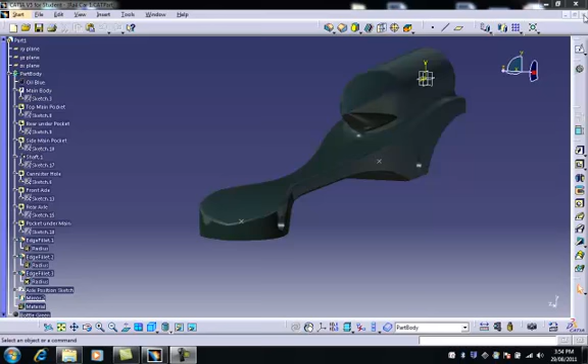Now that I've completed the initial design for my rail car, including axle holes, axle positioning sketch and fillets to all of the relevant edges, I can now close that file and begin thinking about assembling the product. I'll close that. Before we go further, you will need to import these 4 files from the intranet into your computer.

Having done that, we go to New and open a product. So, to begin, the first thing I want to import is the car body. In order to do that, I right click on Product and go down to Components, Existing Component, and then I need to navigate to find the body of my car, which in this case is in that folder called Rail Car. So I open that, and that first part has been imported into the product.

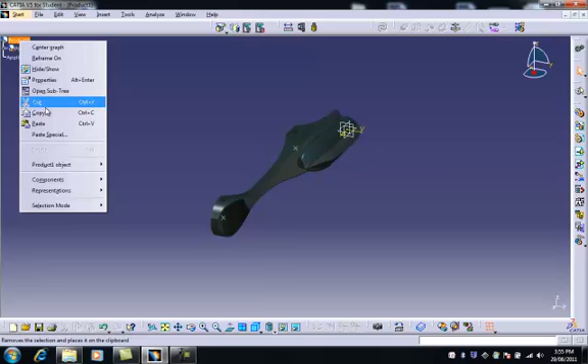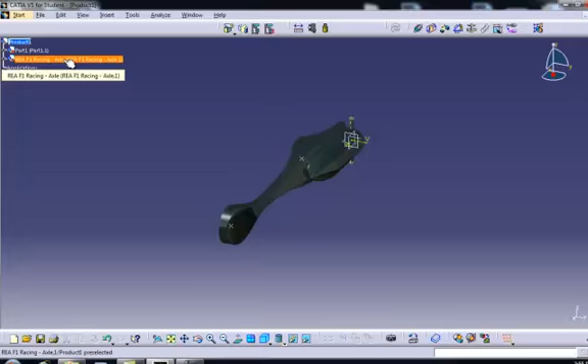From here, I would like an axle. Right click on Product, back to Components, back to Existing Component, and now I need to navigate to where I have stored the axle and the other parts. So here we have an axle being imported onto the screen, but we need 2 axles, so what we need to do now is to right click on the axle file itself and copy that, and then go up to Product, right click on that and paste it. You'll see now we have 2 copies of the axle 1 and 2, as well as the part which is the body itself.

Now we need to import the grommets. So I right click, go down to Components, Existing, and here is the racing grommet. I'll import that. And I need another 3 of these. So what I can do now is I can highlight that and use my Control C to copy, select the product and Control V. This is another way of doing the same thing. Select product again, Control V, and select product again, Control V. There are my 4 grommets.

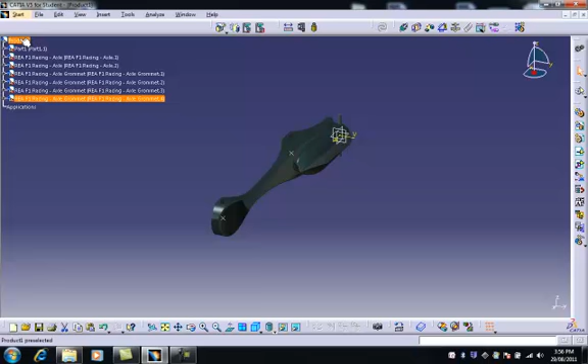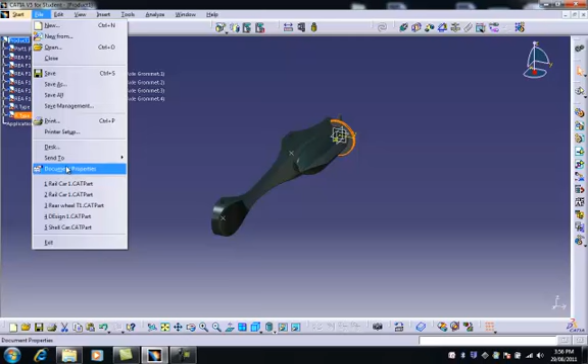From there, I right click, Components, Existing, and I'm going to bring in the front wheel and also a second copy. And finally Components, Existing, and the rear wheel. Copy that and paste it onto the product. We now have 2 rear wheels, 2 front wheels, 4 grommets and 2 axles.

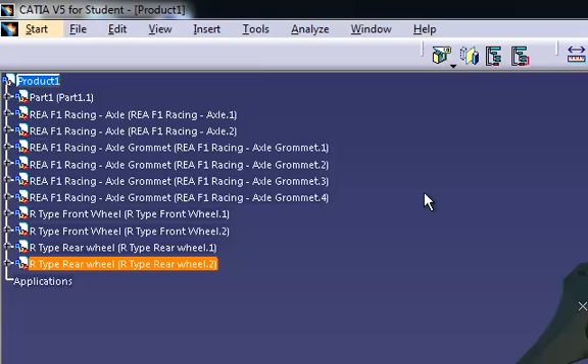Before we start shifting these things around, one of the most important things you can do is learn how to execute a save management process. So here we go. File, Save Management. Make sure the product is selected and go Save As. I need this to be saved into this Railcar folder. So I'm going to open that.

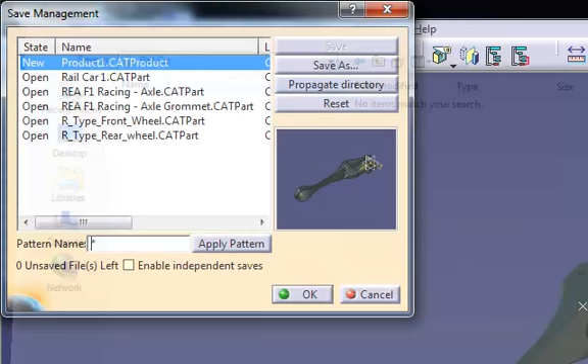So that product 1 is saved into the Railcar folder, and now I have a new option which is called Propagate Directory. So if I propagate the directory and then select OK, what should happen now is if I go back and look in this file, the Railcar file, I have all of these. I have the wheels, front and rear, I have the car body itself, I have the axle and the axle grommet, but I also have this new file called the product which coordinates all of these things. If you've done that and checked it, congratulations, that's the most important process.